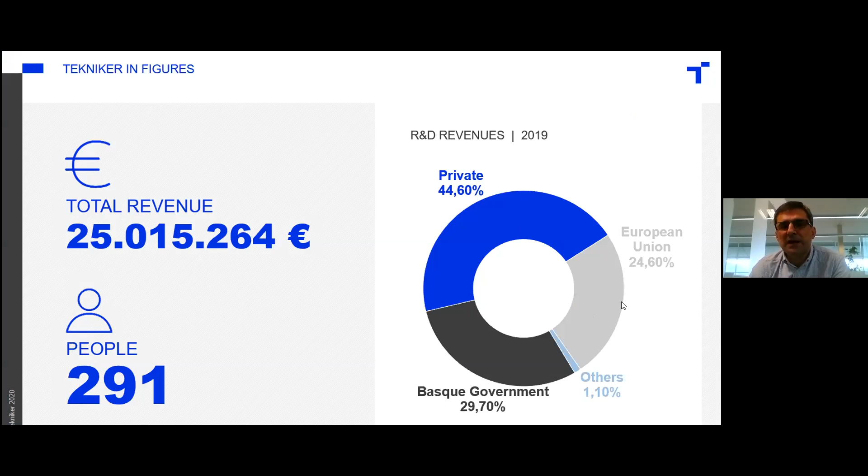We are around 300 people. Our budget is in the range of 25 millions. Most of our incomes come from the private sector with direct contracts with the companies, but we are also very active at European level. In fact, we have more than 30 years of experience in European projects with more than 250 projects along this history, and a good part of them have been led by ourselves.

If we try to summarize TEKNIKER's activities, maybe we can group them in four main research areas. One will be advanced manufacturing, other will be related with product engineering. We are also very active in the surface engineering field, developing coatings and means to implement those coatings, and also ICT is one field.

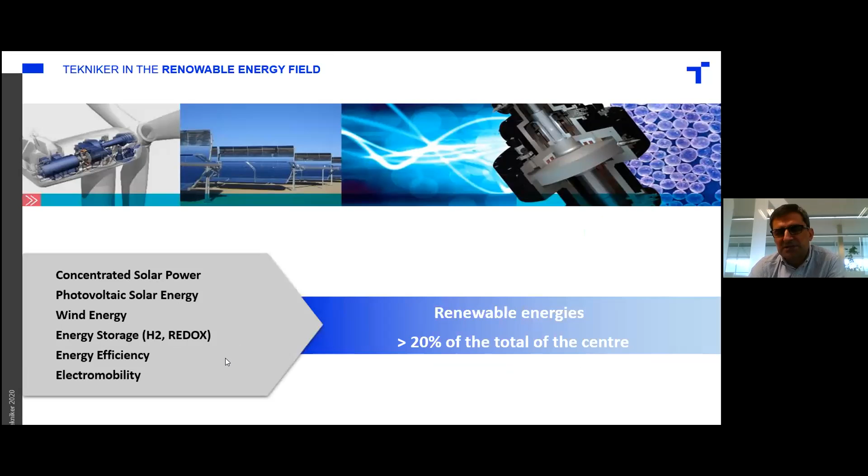If trying to focus on renewable field, we work mainly on concentrated solar power, on CSP, photovoltaics, wind energy. We also work on energy storage, not only thermal energy storage focused on CSP, but also we have developed for redox flow batteries and hydrogen, and also we work on efficiency and electromobility. This is more or less 25% of our incomes in general.

I will now focus on CSP. For CSP, we normally work developing components and systems. On one hand, we develop coatings for receivers and for mirrors. In fact, inside the InPower project, our main activity is related with selective coatings for linear receivers. In fact, we can produce these coatings in 4 meters long tubes. So we can produce, let's say, real receivers for application.

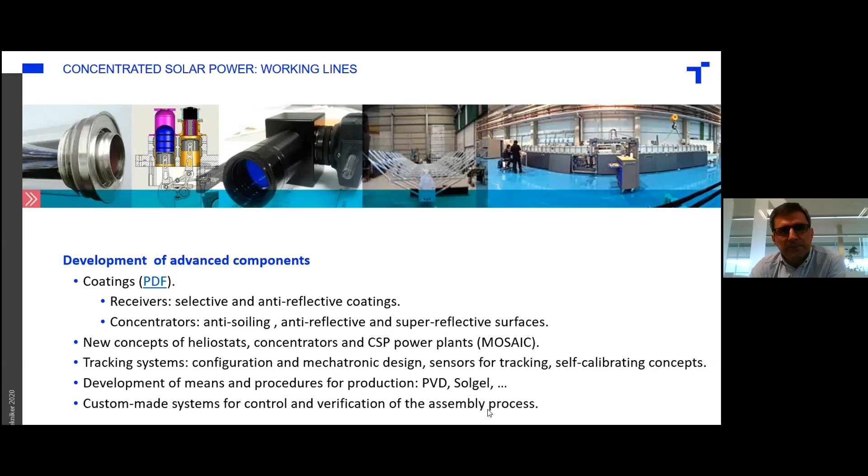We also work in new concepts of concentrators, new heliostats, new tracking systems, and also new CSP power plant concepts, like the one developing in the MOSAIC project that I will present later. And we also develop procedures and means for coatings, and also systems to verify assembly process, geometry accuracy based on autocollimators or photogrammetry or other techniques.

Regarding the heat transfer fluids and the thermal storage media, we also develop new molten salts or additives for them. We also work on the development and characterization and monitoring of heat transfer fluids. And of course, we also model, simulate, or design thermohydraulic systems. And we have also different test benches to test the degradation of the molten salts, but also to test the compatibility of any components of the system in real conditions up to some temperatures.

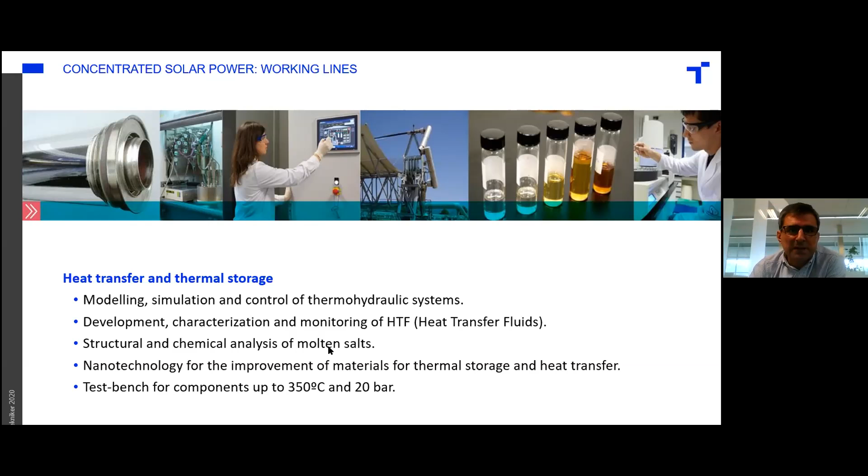Finally, we also work deep in operation and maintenance of the plants. We can maybe group many of our developments under what we call smart CSP, that is trying to apply an Industry 4.0 approach to CSP, developing ad hoc sensors to measure reflectivity, dust, tilt, HTF degradation, and other parameters, to analyzing all these data with big data techniques, developing new controls, and so on.

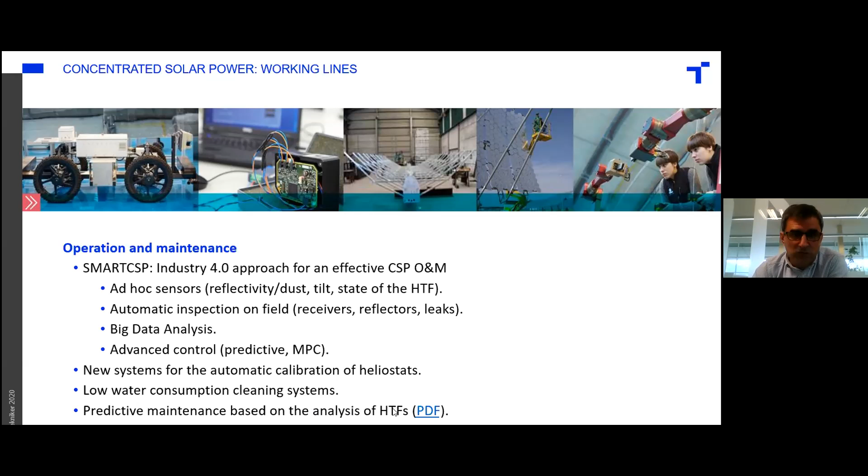We have also been developing automatic calibration systems for heliostats. In fact, this development has been in cooperation with CENER and will be presented later inside the Capture project. We are always working in the reduction of water consumption for the cleaning systems. Much of this work has been also developed inside the WASCOP and SOLWARIS projects and will be later presented probably by TSK. And we also work in other validation and verification processes in the field for the heat transfer fluids, for the collectors, and so on.

We have been working with many of you, we are participating in all relevant associations, and we are participating in many European projects. Today, 3 of them are being presented, and I will focus on the MOSAIC project right now. So, regarding the MOSAIC project, first I will try to explain the motivation. First, I would like to thank the European Commission for the support of this project, and of course, what I am going to present is not only the work of TEKNIKER, but a strong consortium with 10 partners involved in it.

As for most of the projects, the final goal of MOSAIC is trying to reduce the LCOE of the CSP technology. And we are focusing on different points. On one hand, what is clear is that the solar field is the most costly part of the plant. So we must focus on it, and especially on the tracking systems that are one of the most expensive parts of the system. But we cannot forget that if we want to reach high efficiencies, we need high temperatures. So we need 3D concentration to get these values.

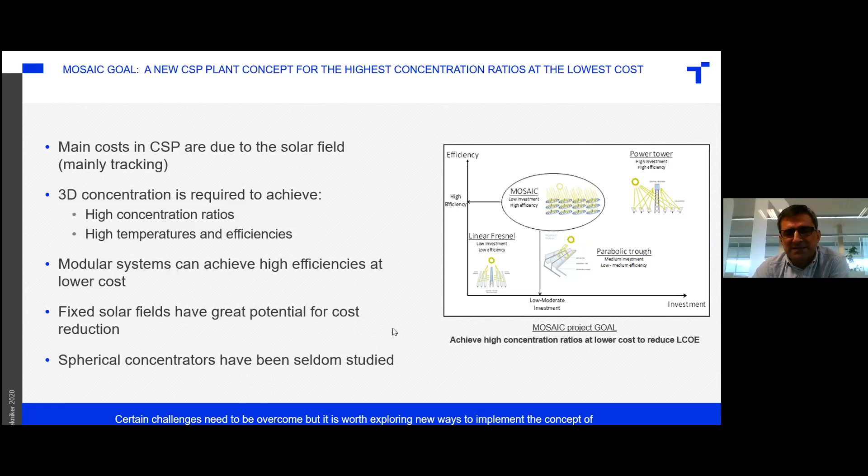And on the other hand, we are proposing a modular system in order to achieve high efficiencies, but with a lower cost. So in order to reach this goal, our approach is to use fixed solar fields that have a great potential for cost reduction. So using spherical concentrators that have been used, but not very often in the past. In fact, all relevant scale prototypes were developed in the last century. Here are the most relevant ones.

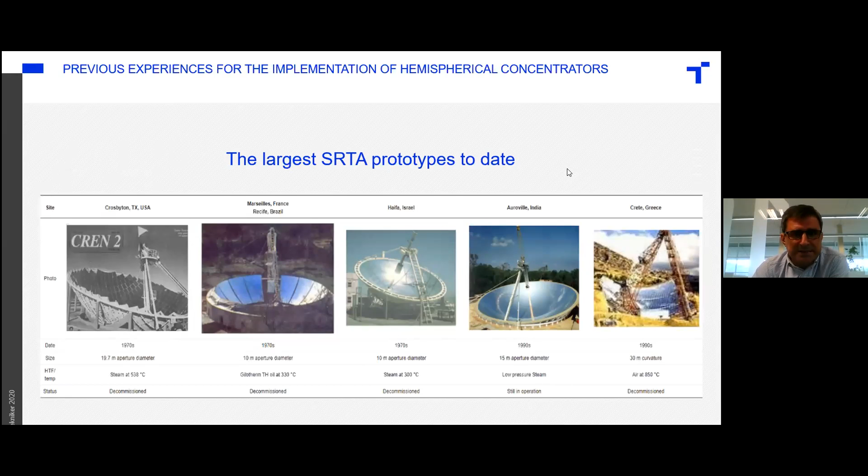So, which is our approach? Our approach is to use spherical reflectors because they can be fixed, because for any incident angle of the sun, a spherical reflector reflects the sunlight into a line. So we can use a linear receiver with a 3D concentration, and we will need only a single tracking system that moves the receiver to track the concentrated flux.

But when we go for large systems, this approach implies very big civil works. So what we are doing is to consider that different spheres with the same center point will still concentrate the light in the same line. So we can use different spheres providing that the center of these spheres is the same. So we are proposing a semi-Fresnel approach for these spherical concentrators.

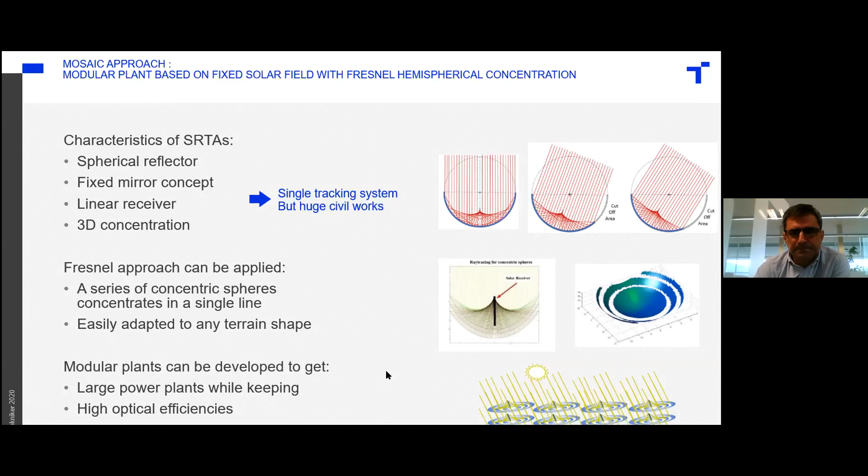And on the other hand, we will use a number of modules so that we can get very large solar plants, so very effective power blocks, but with low attenuation losses, so very good optical efficiencies. So the approach, summarizing, is a multi-bowl plant concept based on spherical semi-Fresnel concentrators with a novel tracking system that I will explain later.

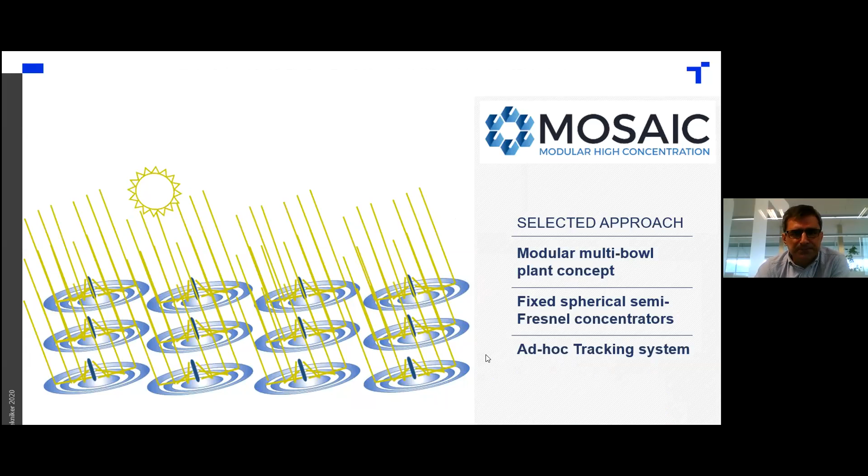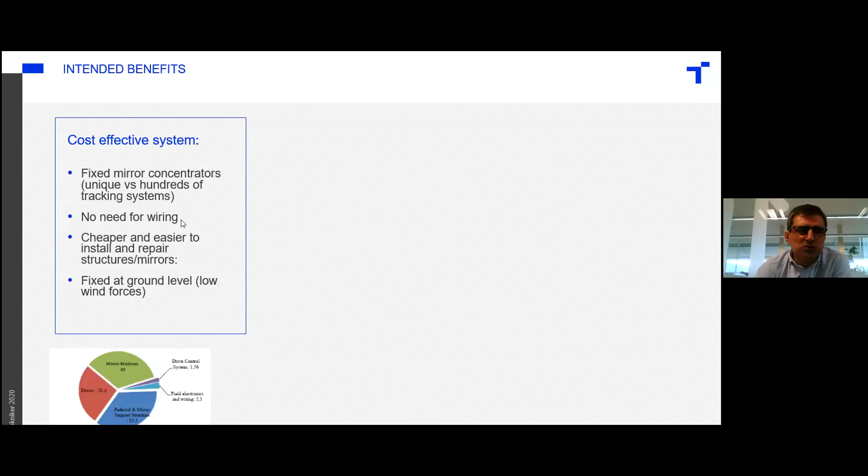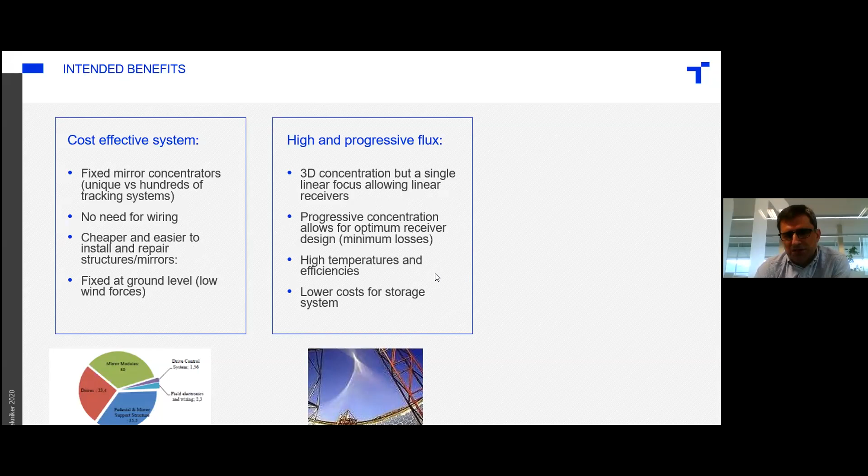So the intended benefits for this approach are to keep the cost down, especially because the solar field is fixed, no wiring is required, no tracking system is required. We will have quite high concentration ratios with 3D concentration in a line. This concentration is progressive from the bottom, from the mirrors to the top. So we can get high temperatures, high efficiencies, and effective storage systems.

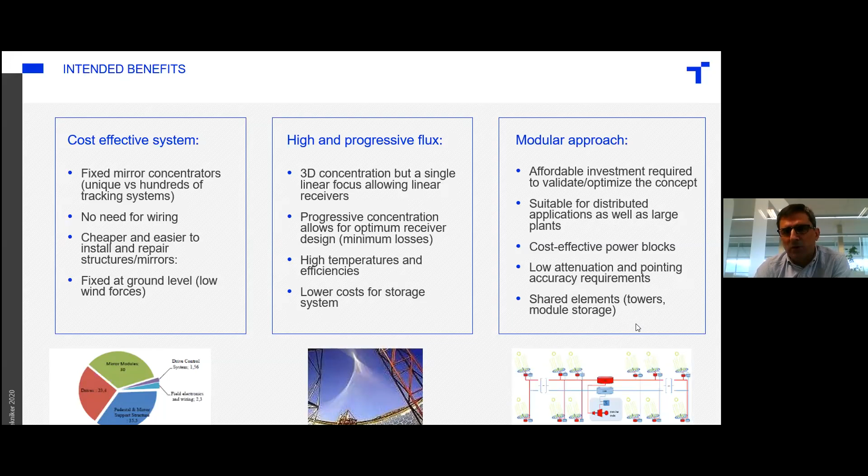And finally, we will have a modular approach that will allow us to validate the whole system with an affordable investment. The system will be suitable not only for large plants, but also for distributed applications. If we go for large plants, the power block will be very cost effective, but the attenuation will be low and the pointing accuracy requirements will be low. Finally, we can share different elements like the towers or the module storage systems between different modules.

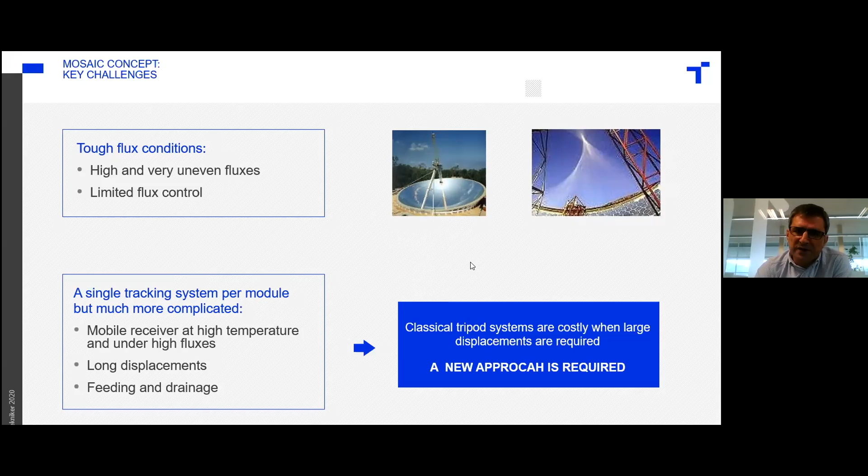Of course, not all are good news. We have some challenges to solve. On one hand, we will have quite tough flux conditions because we cannot defocus the solar field. The solar field is fixed, so the concentrated flux will be there above the solar field at any time. And on the other hand, when we go for very large spherical concentrators, the classical tripod systems to support the receiver become very, very expensive. So we are proposing a different approach for the tracking system.

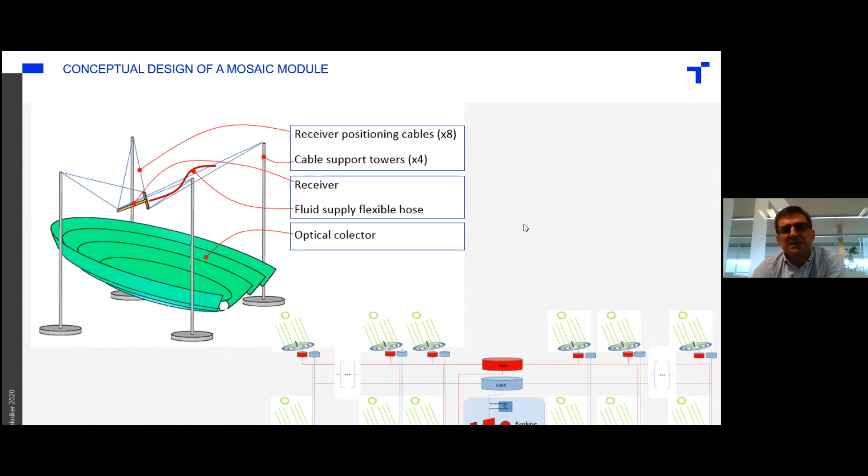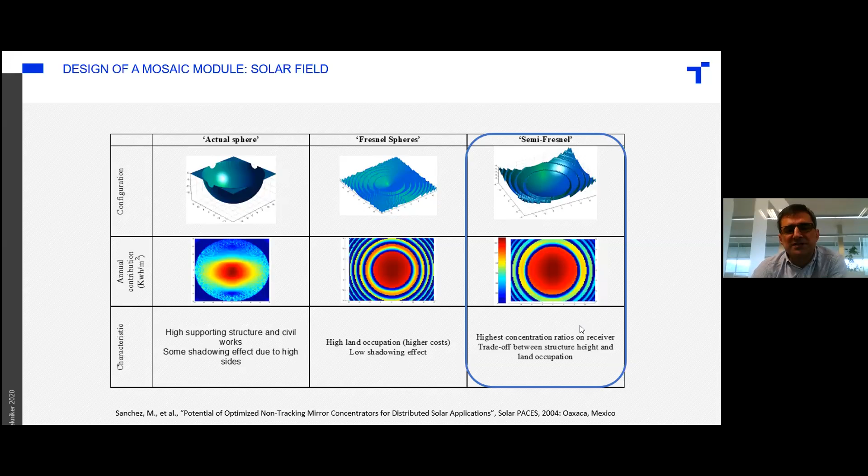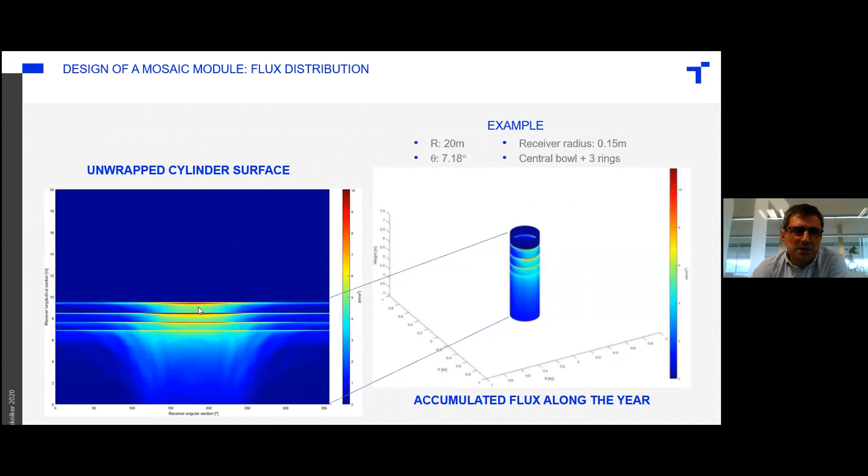If we look at the receiver, this is the cylindrical receiver, and this is the accumulated flux along the year. If we unwrap the cylinder, we can see here this flux distribution. We see a number of peaks that correspond with the different spheres that we are using. This corresponds with a central bowl and 3 rings around it.

This solar flux is not uniform, as we have seen, and it is not constant along the year and along the day. This corresponds with the situation on March 21st at 8 o'clock in the morning, 10 o'clock and midday. So the flux is quite uneven and quite variable along the day.

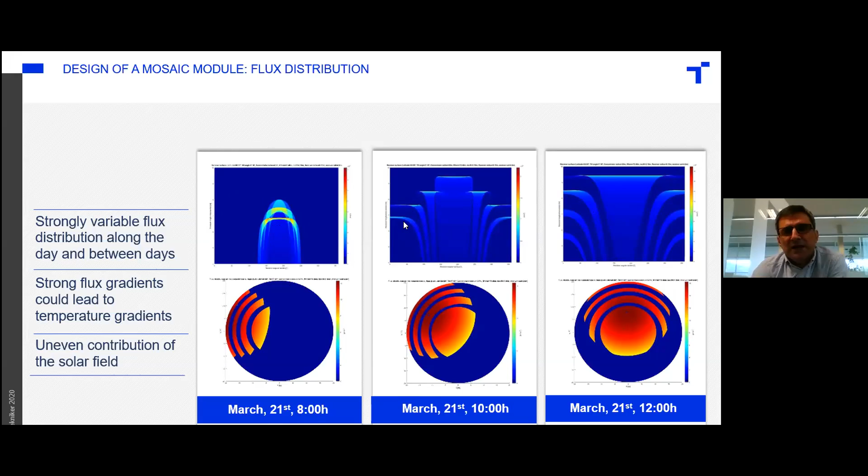And of course, we can imagine that for different hours along the day, the contribution of the solar field, which is what we are seeing below, is very different. Early in the morning, the west part of the solar field is reflecting the light on the receiver, and at midday, most of the solar field is working. But the contribution of each part of the solar field is not the same.

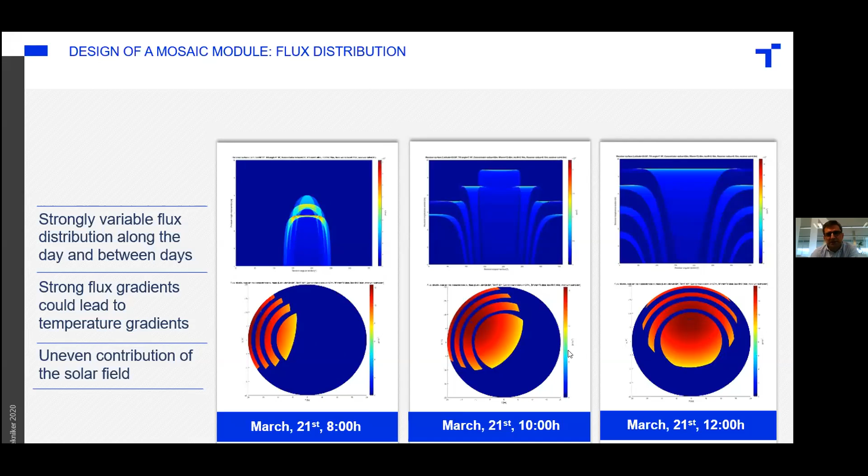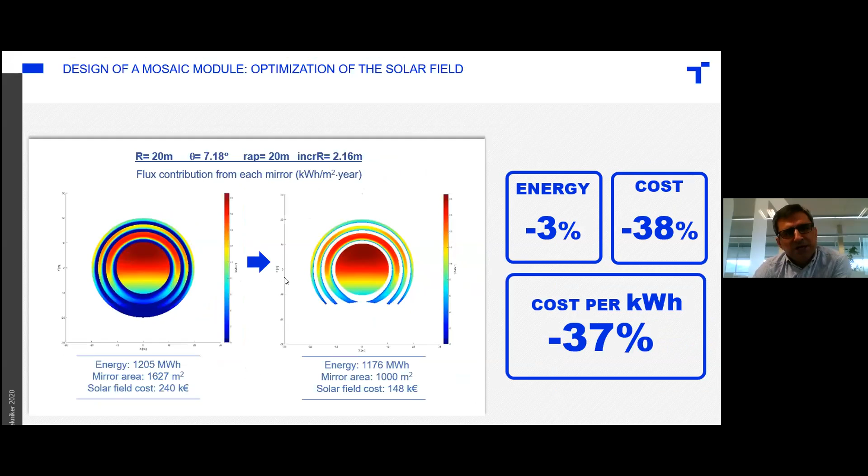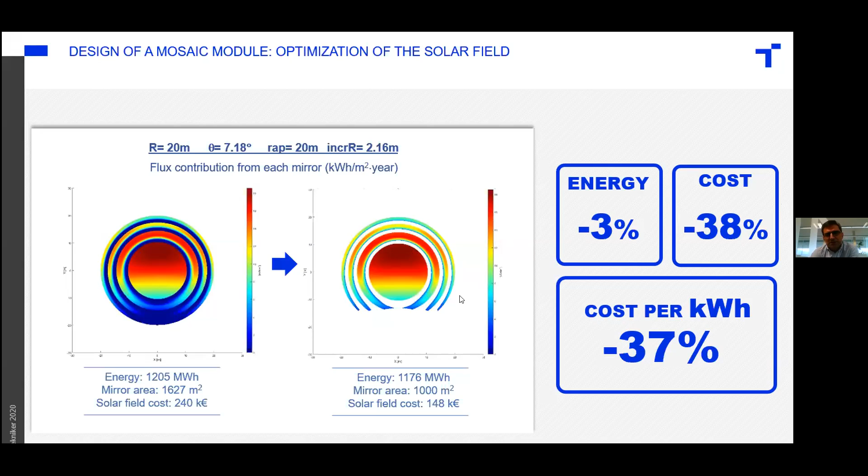So if we see the energy provided along the year by the solar field, we see that there are many parts that do not contribute very much to the energy. So some parts of the solar field could be removed with nearly no loss in the energy, but a great cost reduction. And we also can get some corridors to access the mirrors. That is also very interesting for the application.

So when we go for the real implementation of this system, we see that implementing these continuous rings is not the best, the most cost-effective approach, so we are proposing to use two kinds of modules.

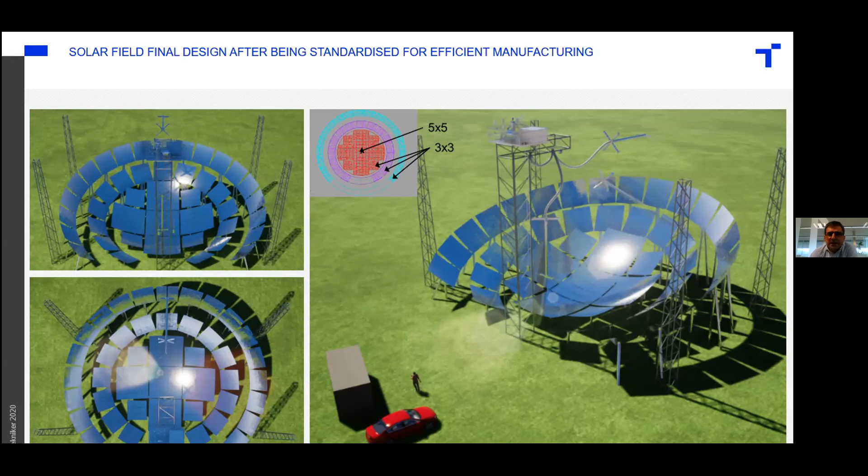In the central bowl, we will use modules with 25 mirrors, 1 square meter per mirror, so 25 square meters per module. And around these modules, we will have modules with 9 mirrors, 3 by 3 modules, so 9 square meters. In this way, we can standardize the manufacturing process and get a more cost-effective approach.

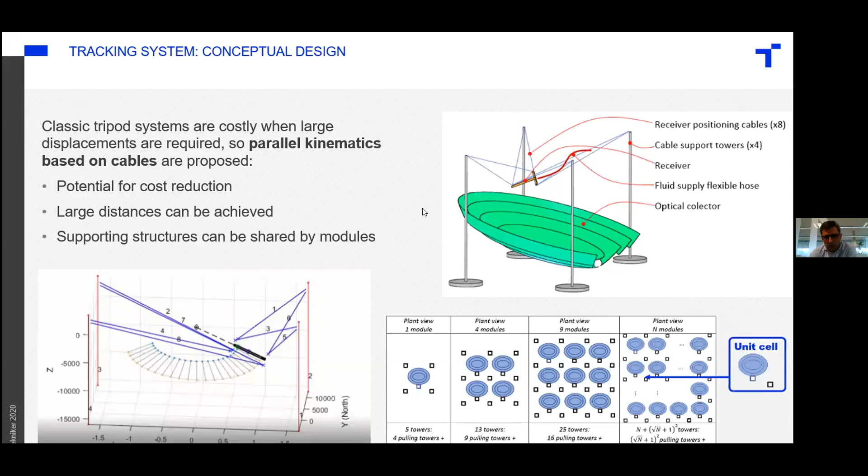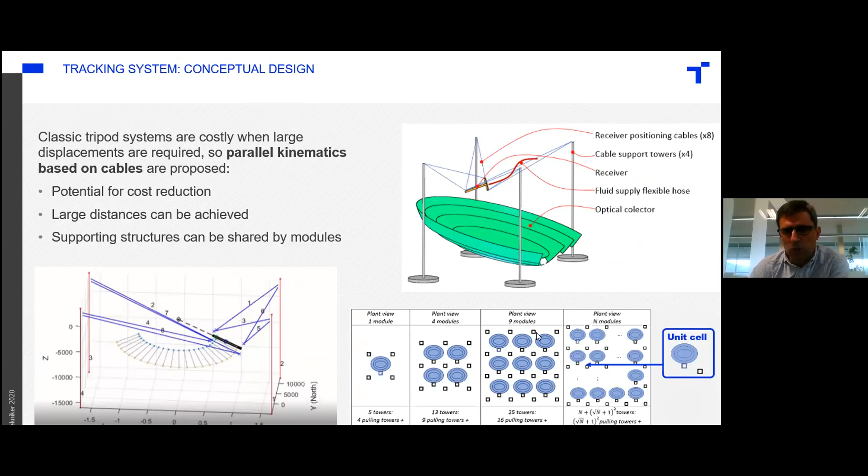Regarding the tracking system that I started to talk about before, what we're proposing is a parallel kinematic approach based on cables. In this way, the tracking system can be very cheap, so there is a potential for cost reduction. We have checked that we can reach all the workspace, all the positions that the receiver must reach. And on the other hand, we can share the structures, the towers between the modules, so we can reduce the cost also.

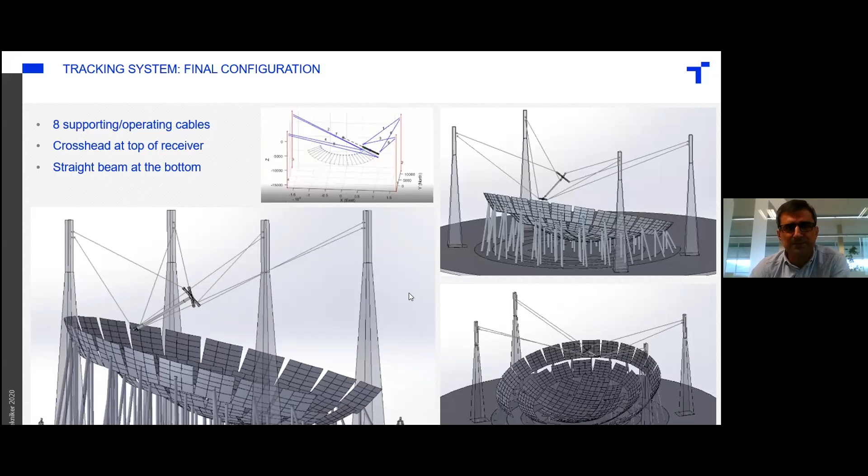So the real view of this tracking system will be something like this, with 8 supporting cables, 1 crosshead at the top of the receiver and 1 straight beam at the bottom that will support the receiver during the movement. One critical point here is that we are using a quite flexible and quite complex tracking system, because it's a hyperstatic system. So a quite complex control system is required. Due to the flexibility of the system, we need a closed loop control system. We cannot use an open loop system.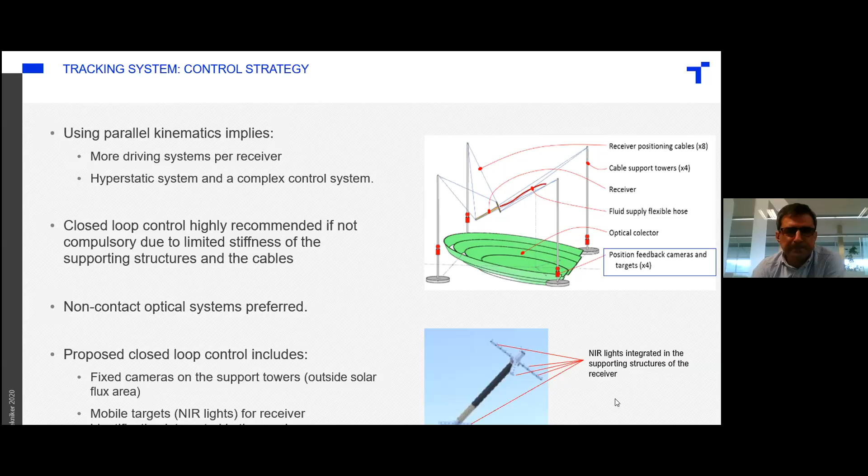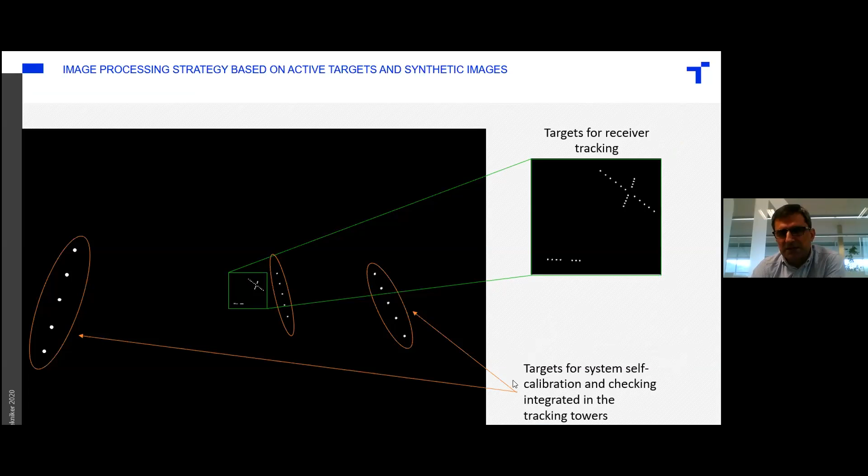So we have incorporated a non-contact optical control system based on fixed cameras that are attached to the towers, and some lights on the towers and some lights on the crossbars on the beams that are supporting the receiver. So these cameras will be looking at the receiver and at the lights on the towers, and after some image processing, we will be able to identify the receiver position, and we will use these targets on the towers for self-calibrating the whole system.

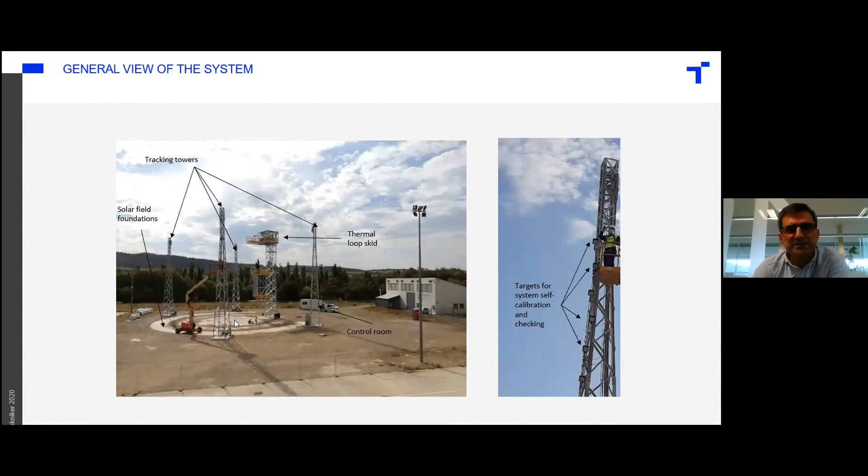So where are we now? We have built up part of the system already. We have on the field the tracking tower systems. We have the skid, the thermal loop already in place. We have the foundations for the solar field. You can see it here on the floor. We are starting to manufacture the modules. Here you can see a 3 by 3 module with 9 square meters.

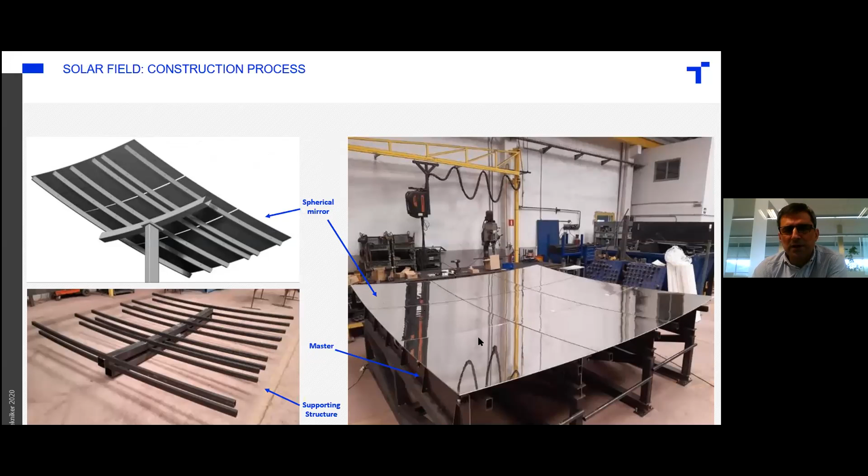Rio Glass have already produced all the mirrors. They are curved mirrors, spherical mirrors, curved to the right curvature for each ring. We have checked the accuracy of the mirrors, which has been good for the application. And we are also developing the alignment checking process for the modules.

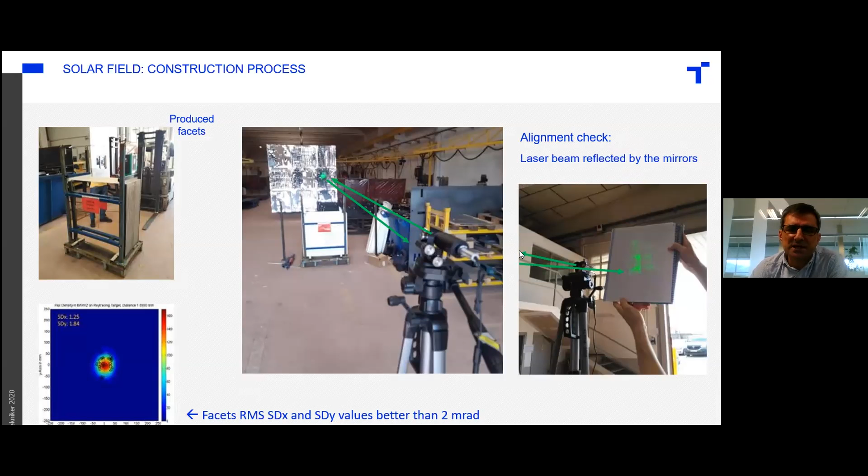Thanks to the characteristics of the spherical concentrators, if we use a laser beam located at the center of the sphere, at the right distance from this module, the light should be reflected directly to the same point. So it is quite easy to check if the mounting process is right or not, and to modify the system.

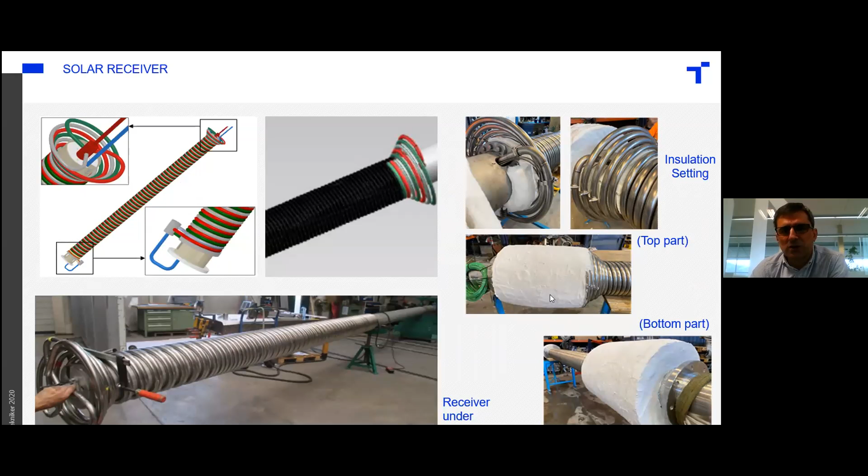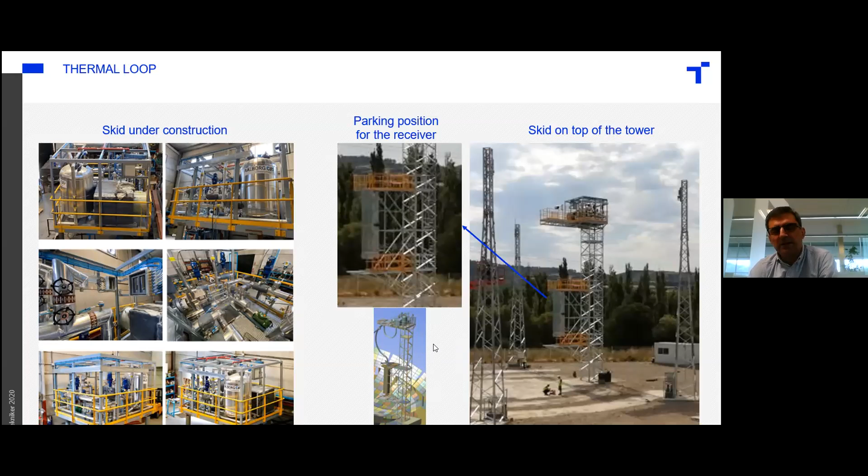And here we can see the thermal loop that has been built up by Albor in a skid. This skid is now installed at the top of a fifth tower that gives access to the center of the spheres that will be here. And we have also incorporated a parking position where the receiver can be put during the night or for maintenance operations.

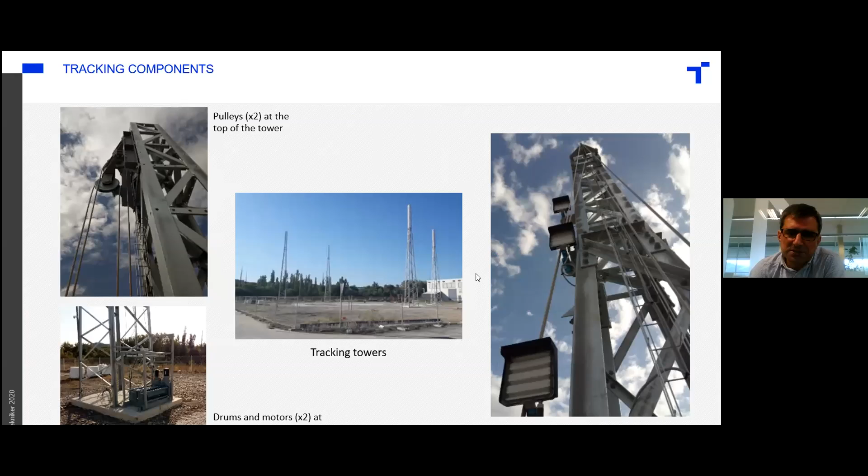Finally, the tracking system is now being installed and verified. The drums are on site, the pulleys, the active towers have been checked. We are now solving some issues that have appeared, but all the system is ready for the first verification for the setup of the tracking system. For this operation, we will not use the real receiver for security reasons, but we have built up a dummy with the same geometry, with the same size.

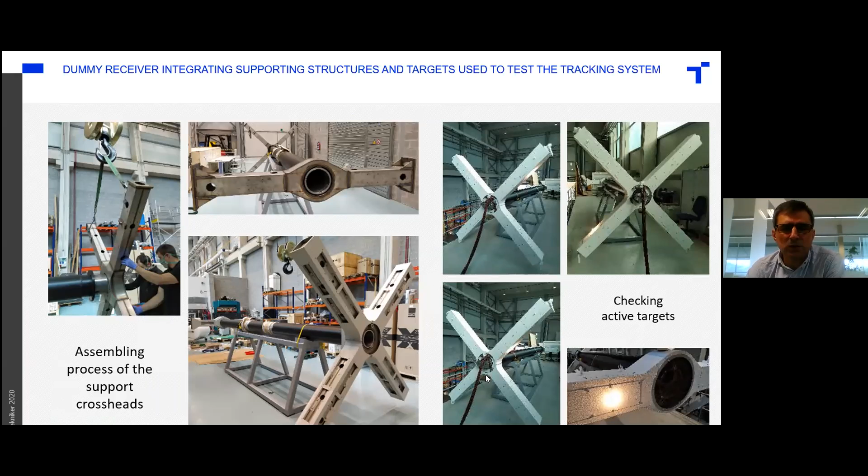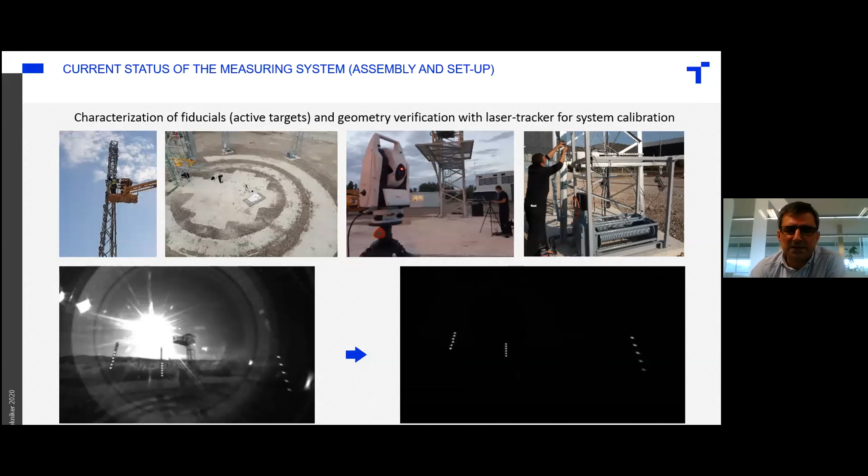So as a conclusion, we have proposed a new CSP concept with good cost reduction potential. The components have been already designed and manufactured. The assembly process is ongoing, so the system is under construction, and in the coming months we will test it so that we can validate the system and identify which are the most promising commercial applications of the system, not only for large plants or distributed plants for electric production, but we are also considering the application of the system for the production of solar heat for industrial processes.